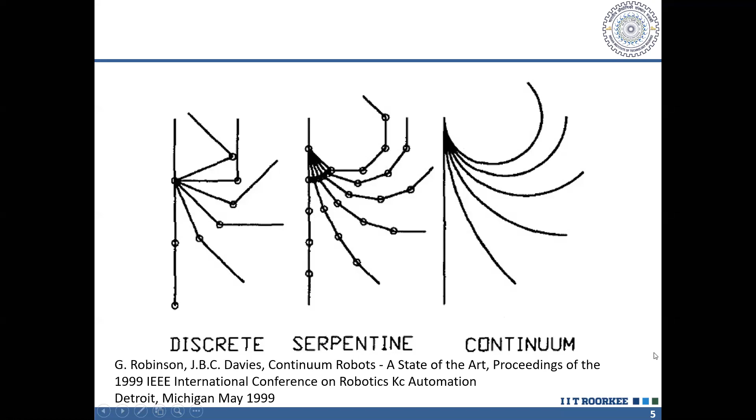So a soft robot is inherently compliant and exhibits large strains in normal operation itself. As I gave you an example, the commonly used hard robots are non-redundant, because non-redundants are used in normal operation, since redundancy actually creates a problem in control.

If you have a redundant robot, although we have some advantages, redundant basically means that you have something extra. That extra has an advantage many times, especially if some of the links fail or some joint fails, then you can reconfigure that extra degree of freedom and get the job done. So that advantage you have, but from the control perspective, there are difficulties in controlling such a robot.

The most commonly used hard robots are kinematically non-redundant, and they have a well-defined environment in which they repeatedly perform the given task with very great precision.

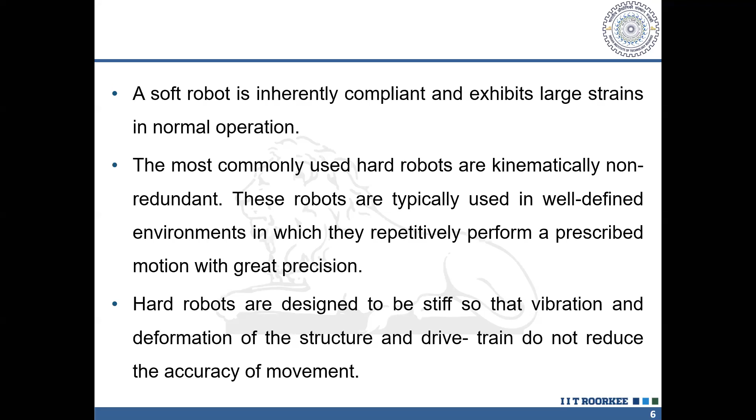These hard robots are designed to be stiff, so that vibration and deformation of the structure and the drive train - that is, the transmission used to transmit power from actuator up to the joint - do not reduce the accuracy of the movement.

Hard robots are hyper redundant when the number of joints is very large, and hyper redundant robots have the potential to work in unstructured environments and provide high dexterity. As I said, we can use the extra degree of freedom to our advantage when the robot is working in an unstructured environment. So these are the hyper redundant robots.

By nature, soft robots and traditional hard robots use different mechanisms to enable dexterous mobility. So if we look at the capabilities of hard and soft robots, let's look at the first figure.

Can you see my cursor? Anyone, please? Yes sir, yes sir, okay fine.

Suppose you have a hard robot here - this is one link, first link, second link, and third link with a gripper. Now if there is an obstacle, and suppose your robot is performing some motion, and it so happens that you cannot give the joint a specific rotation so that it does not hit this obstacle, so it is going to hit the obstacle this way. But in case of a soft robot, you can see that your robot can be deformed this way so that it is able to avoid the obstacle. So that is what we call dexterity - this soft robot is more dexterous compared to the hard robot.

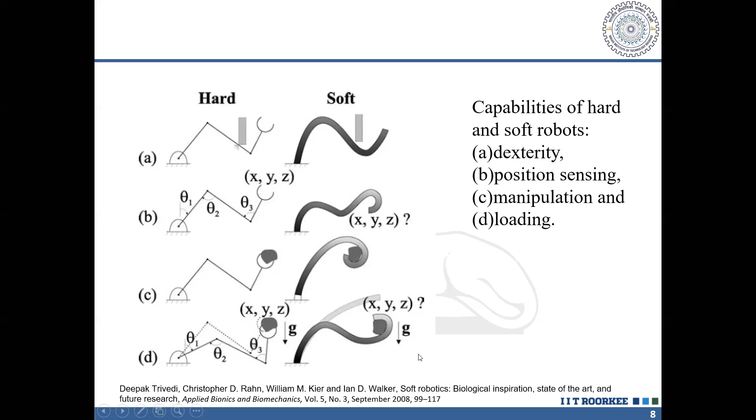So we have seen that there are two advantages: they are more dexterous, the soft one, and they can easily manipulate the object, maybe with a greater load. But the position sensing is difficult, and the deformation because of the weight is also more in case of the bionic manipulator.

So soft robots have distributed deformation, with theoretically an infinite number of degrees of freedom. If something is continuous, each point position has to be defined basically. That is why we call it as having an infinite number of degrees of freedom. This leads to a hyper redundant configuration space where the robot tip can attain every point in three-dimensional workspace with an infinite number of robot shapes and configurations.

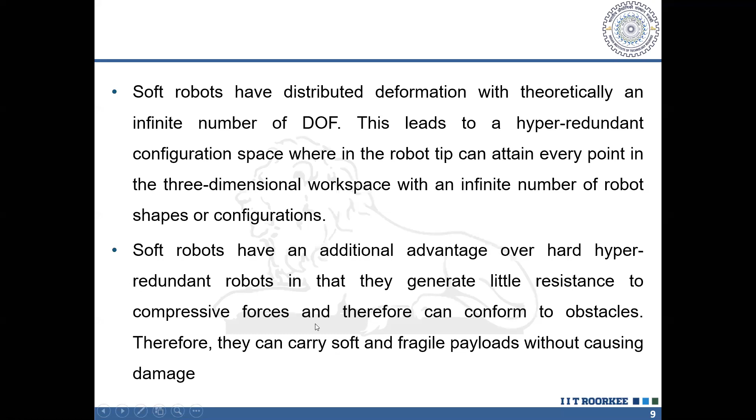But soft robots have one additional advantage over hard robots: they generate little resistance to compressive forces, and therefore they can conform to obstacles, and they can also carry soft and fragile payload without causing damage because they are soft in nature. They do not give resistance to the compressive forces. So that is the advantage of it.

The actuators of soft robots are typically integrated into and distributed throughout the structure. As I said in my first slide, either they are actuated pneumatically or they have wire actuation. Often the actuator makes up most of the structure in case of soft robots.

Soft robots fall into a class of systems termed under-actuated robots, because unlike hard robots, there is not an actuator for every degree of freedom. Other degrees of freedom may be influenced by actuators, but many degrees of freedom are not controllable. As I said, sensing and controlling the shape of the soft robot is always a challenge, and since their structure is continuum, the exact measurement of shape and tip position is difficult.

I think I discussed this point already about joint rotation. Joint position can be processed, and I believe you've gone through some basic lectures on robotics. Forward kinematics is finding the tip position and orientation for a given joint rotation. Inverse kinematics is the opposite: given the tip position and orientation, what are the joint angles? That is what we call inverse kinematics.

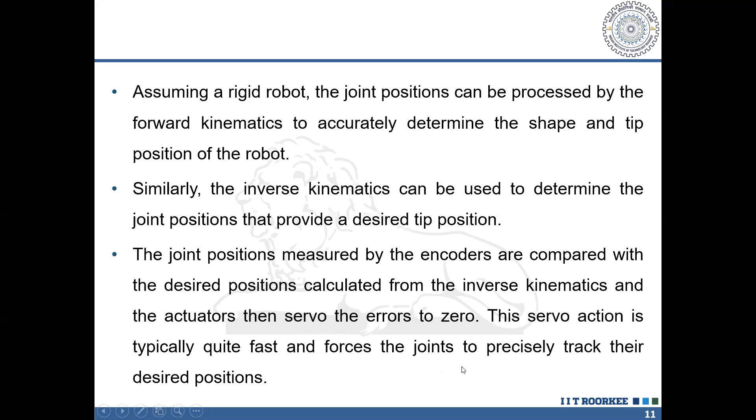Soft robots interact with the environment differently from their hard counterparts. Gravity and contact loading cause continuous deformation in the soft robot that may not be observable or controllable from the limited sensors or actuators respectively, as I discussed, this is one of the problems. But the advantage is that the soft robot can locomote using a variety of gaits, with a large portion of their structure in ground contact at any instant of time.

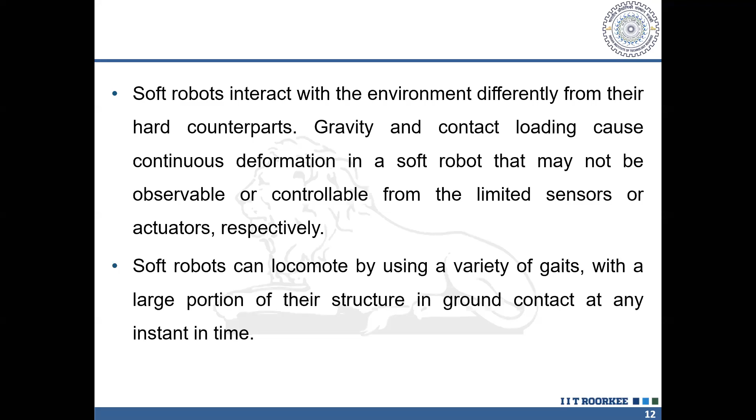If I talk about a snake robot, which can be mimicked by mimicking a real snake, that's also a continuum structure, or continuum shape, and a large portion of its structure is in ground contact at any instant of time.

Now let us look a little at the state of the art, how different people have explored different aspects of the bionic manipulator to design different types of robots.

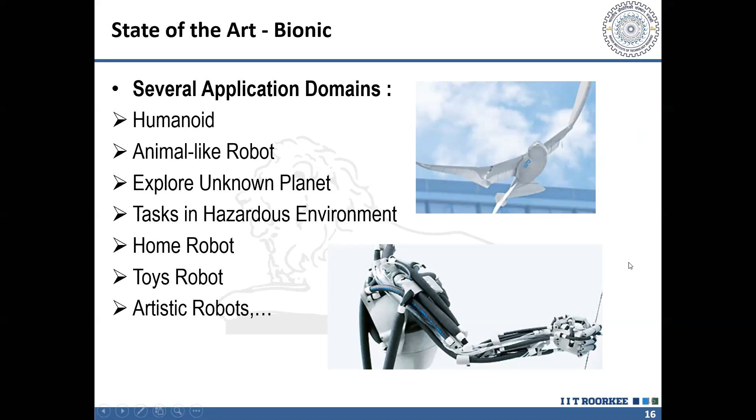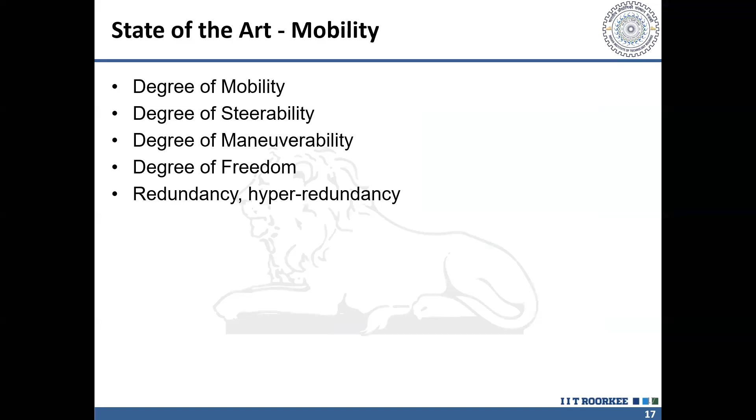Now coming to the mobility aspect or mobility issue, mobility can be explained with the help of the degree of mobility, degree of steerability, degree of maneuverability, degrees of freedom, and redundancy or hyper-redundancy.

If we look at the terrestrial mobile robots, terrestrial meaning something that is on the land, the terrestrial mobile robot could again be of different types. In general, we know about the wheeled robots, and everybody knows these types of robots are very common. So they could be either wheeled ones, or they could be tank type structures.

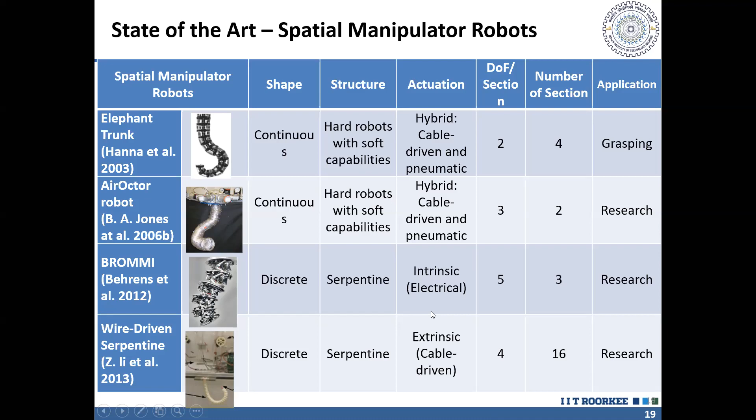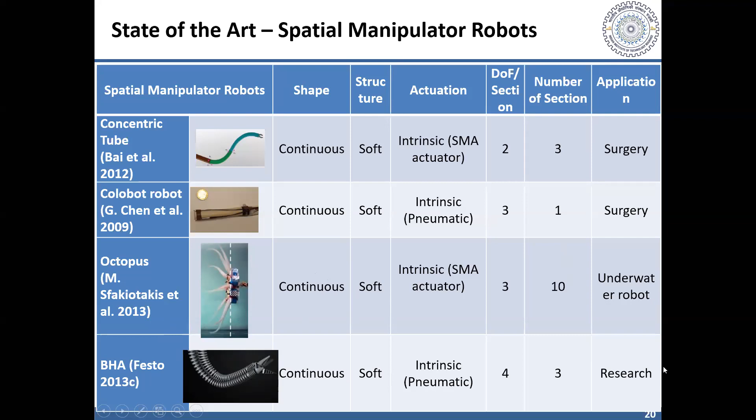Then we have an example for mobile manipulator robot - that is, you have mobile also and manipulator also. So mobile manipulator means there is motion to the base, what we call making the robot mobile, and there is manipulation capability in it. So we call it the mobile manipulator.

In industrial robots, if the base has got motion, meaning there is an additional extra axis on which the base itself can move, this falls under that category. Or we have space robots, agriculture robots, large scale pipe manipulators, ones used in hazardous applications like bomb disposal, or rescue robotics.

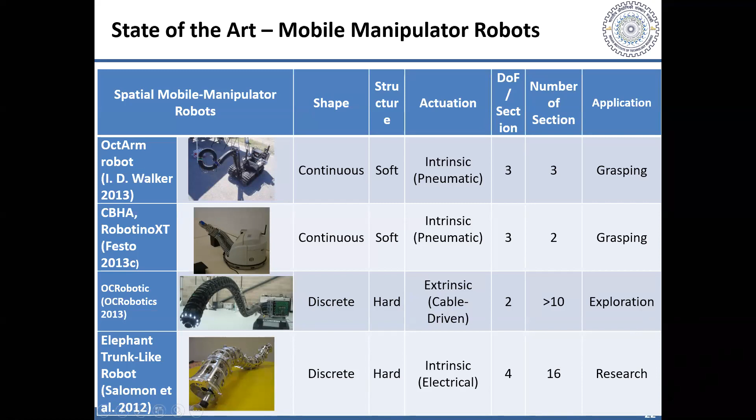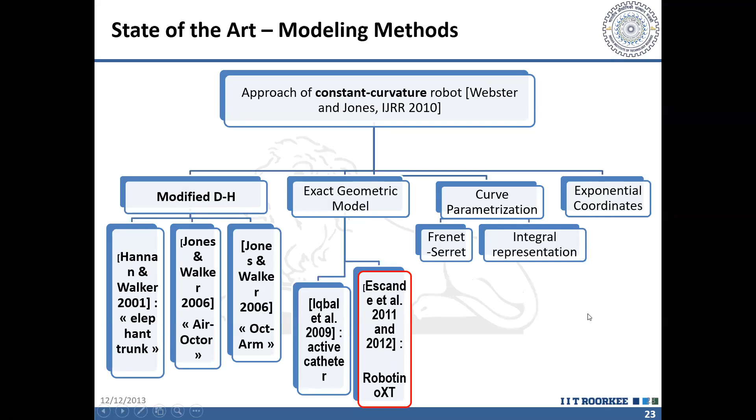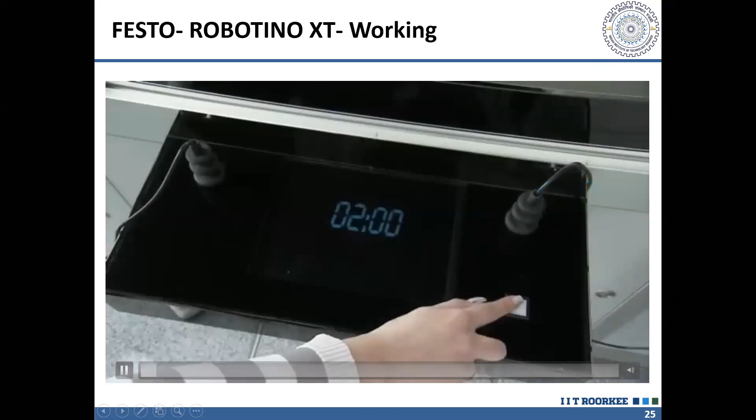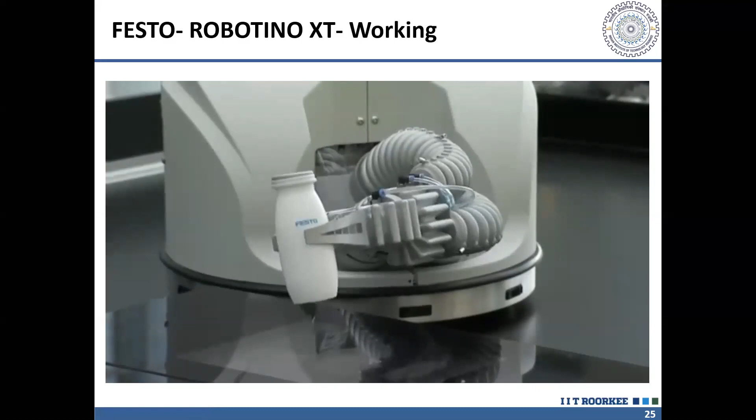So this is how it looks like, if you could see the video. Are you able to see the video? Yes sir. Okay, nice.

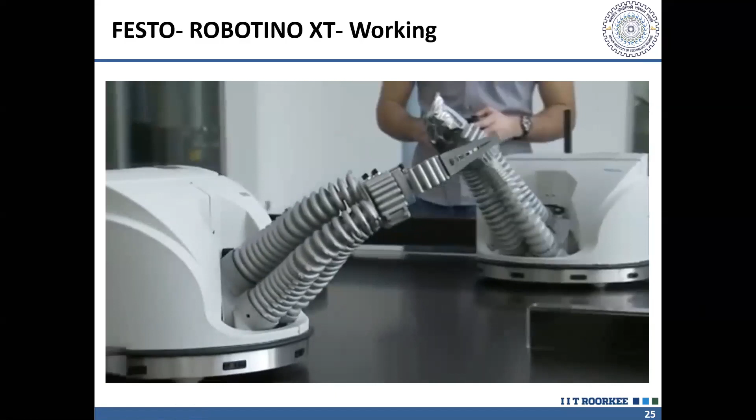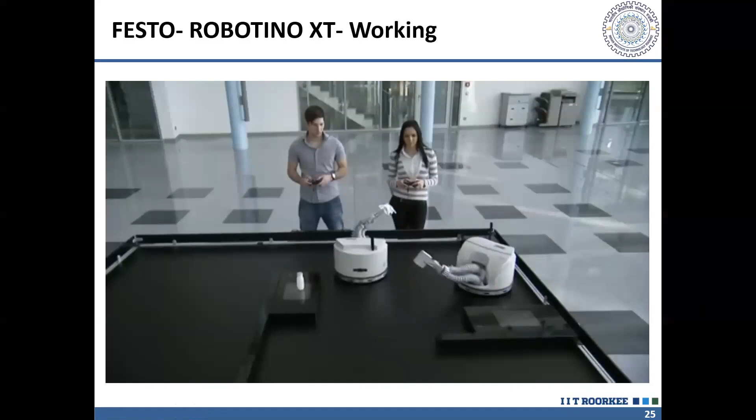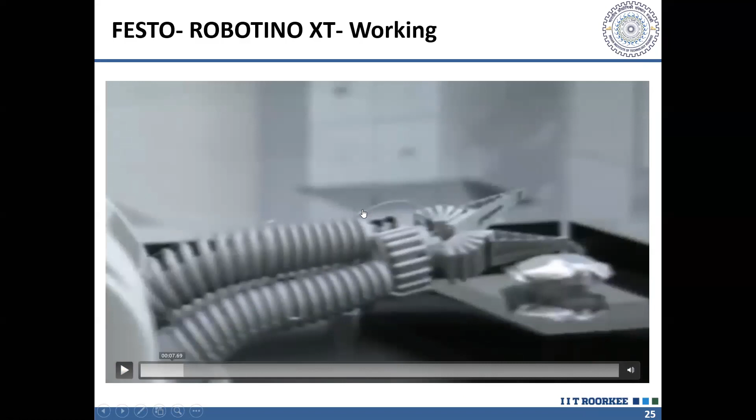So there could be two such robots, and in fact they can cooperate also. In this one, you are seeing the tubings. This tube which you are seeing is basically used to pneumatically actuate the different sections.

So you can see these tubes basically. There is a compressor inside this mobile robot, and there are valves through which air is allowed to enter into the different sections. For example, these 2 tubes are for the rotation of this gripper. Likewise, the different sections are there, and here you can see something shining - this is the wire, basically the potentiometer which I talked about for measuring length. So the length of the robot, or the different sections, can be found out with the help of these potentiometers.

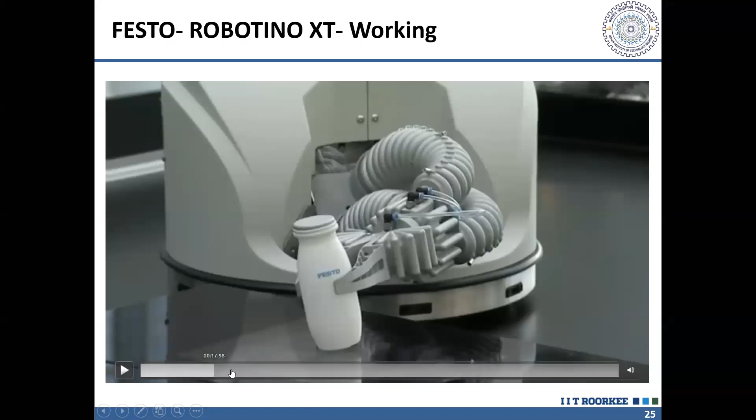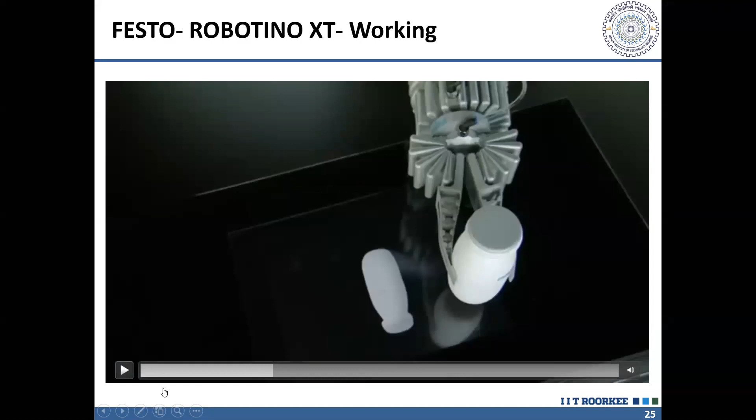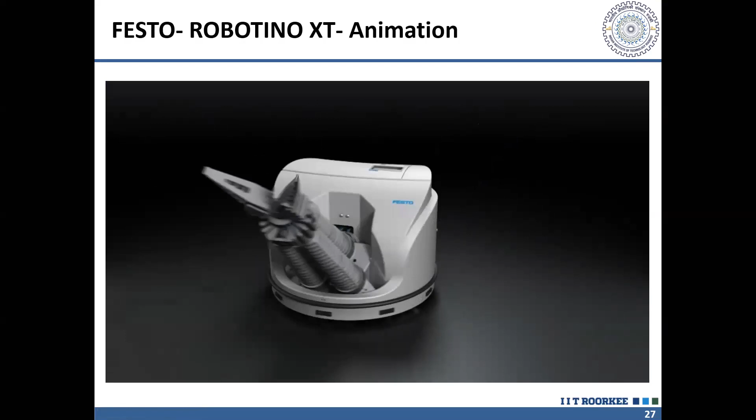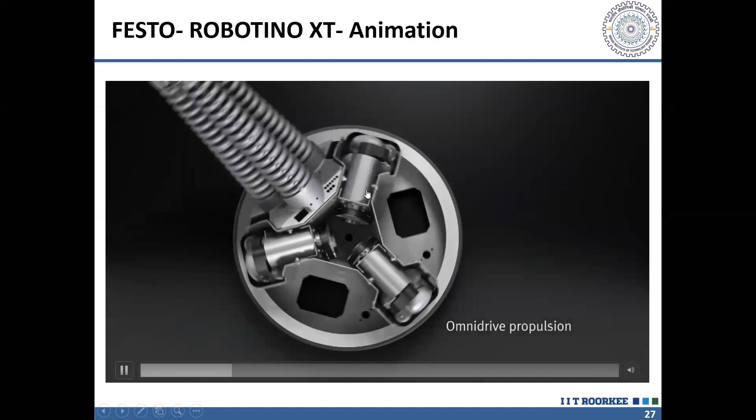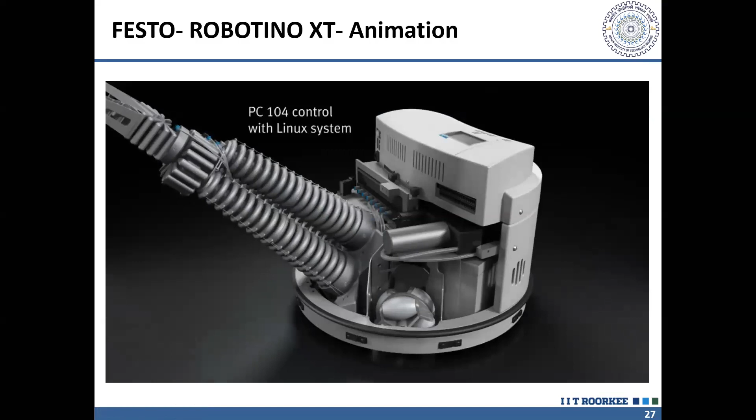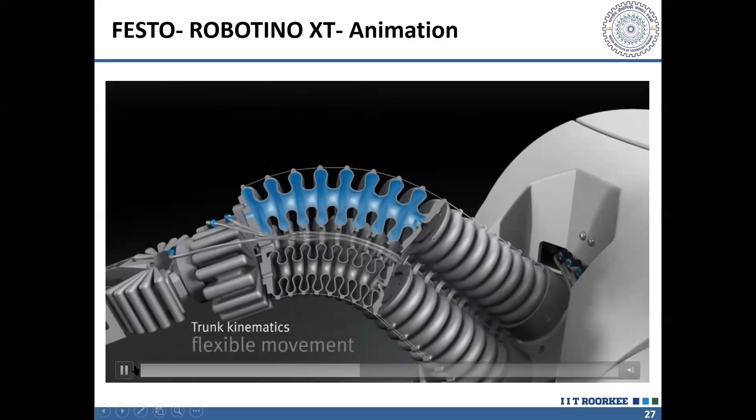And if you want to see how it is inside, the structure can be seen with the help of this animation. This is how they deform, and you can see the 3 Omni wheels here for the mobile manipulator motion, along with the description of different components. This is how these sections are basically - this is the shape of the tube, you can see from here, and these are the tubes which carry air for the actuation.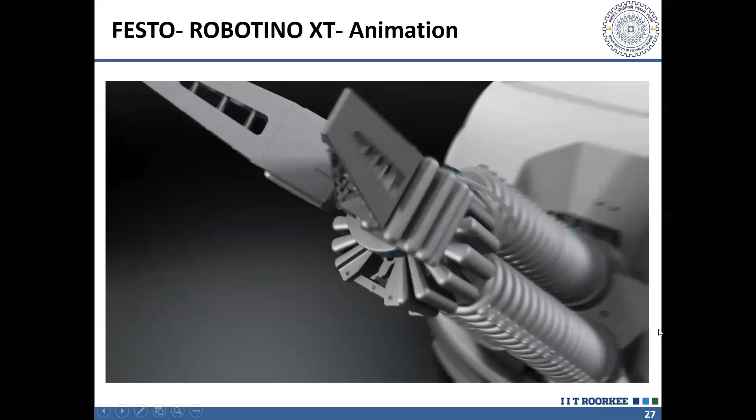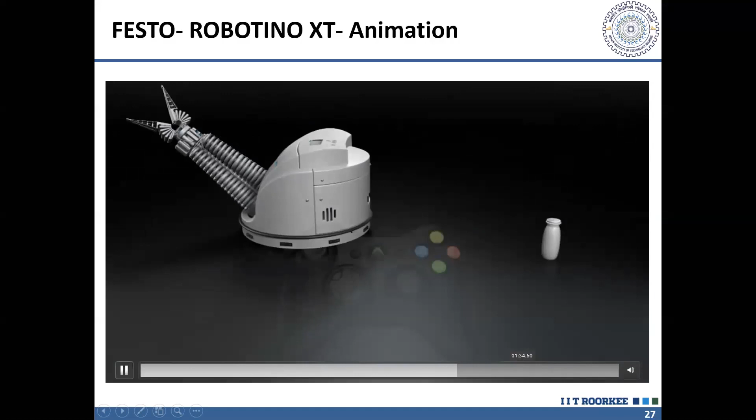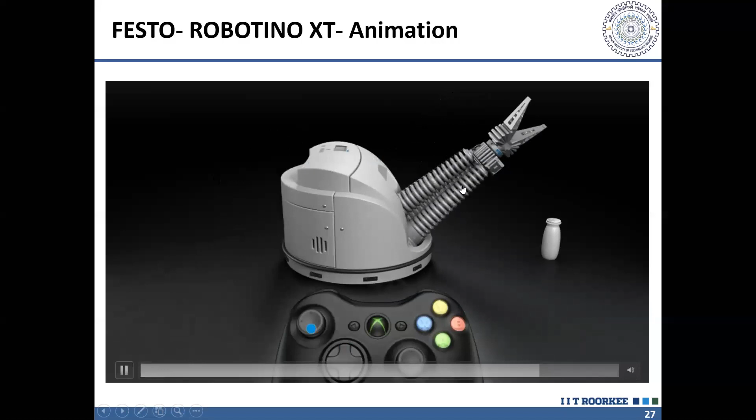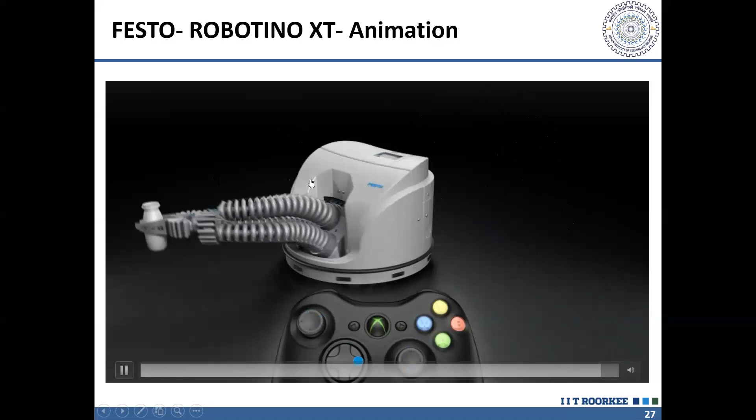Fine, I think I have to be a bit quicker. You may ask why we studied this system. One of my PhD students is currently working on this. We studied this system because currently it is actuated with the help of a joystick, but we wanted to have a closed loop controller for this one. For that, we needed to study the dynamics of this manipulator so that we can design a closed loop controller.

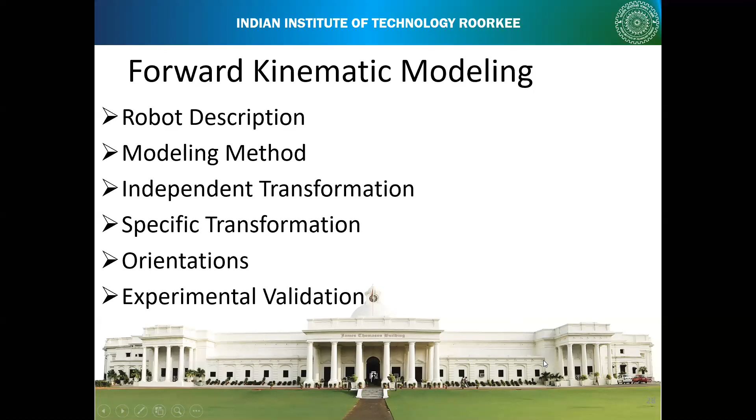So next, as I said, I'll be talking a little more about this one. The forward kinematic modeling, robot description, modeling method, independent transformation, specific transformation, orientation, and experimental validation. Some of these things I'll be talking about.

This robot is named Robotino XT, and it's an omnidirectional mobile platform called Robotino. The mobile robot comes separately, which is called Robotino, and the bionic one is put into that. The bionic one is actually called Compact Bionic Handling Assistant, or CBHA. It's a hyper redundant continuum robot. There are 2 sections with 3 tubes per section, 1 rotation part, 1 compliant gripper, and pneumatic actuation.

There is limited extension. What does it mean? That you cannot increase the length. Whatever you have to do, you do with the help of actuation, or rather deformation of the length. So there is a limited extension, and the trunk is a succession of polyamide based backbones where their deformation depends on the material flexibility.

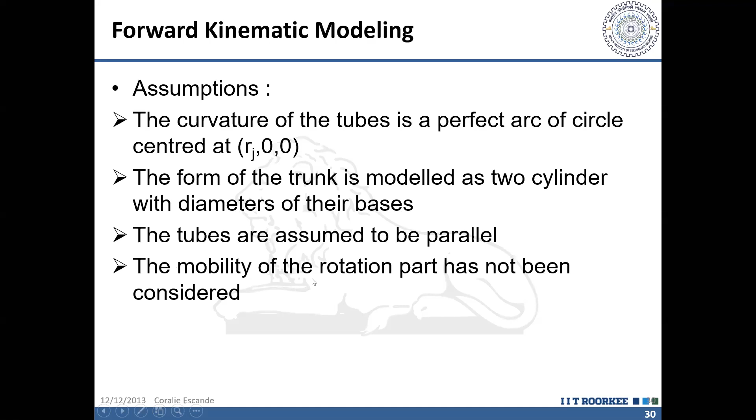So when modeling, as I gave a hint, we model them as a constant curvature section. The curvature of the robot tube is a perfect arc of a circle, which is centered at say RJ00. RJ is the radius of that particular section, and the form of the trunk is modeled as two cylinders with diameters of their bases. The tubes are assumed to be parallel, and the mobility of the rotation part has not been considered in this modeling.

So here we can look at the forward kinematic model for this. As I said, these are the two sections. Although these are part of the frustum of a cone, basically you can see that they are reducing gradually, but to simplify our analysis, we assume that this part has got a diameter D1 and this part has got a diameter D2.

As I was telling you, there are potentiometers to measure the length. Say this potentiometer has got a length L1. In the back, there is another tube, so that has got length L2, and this one has got L3. So here we have L4, L5, and L6.

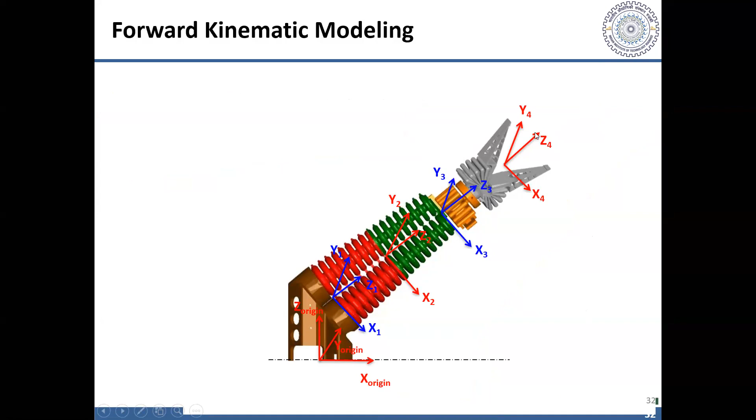For the forward kinematics in this case, if you are given these tube lengths, what are your position and orientation of the tip, basically? That is the forward kinematic problem in this case. So we assign a coordinate system at the origin, then a coordinate system at the base of the first section, second section, and here for the gripper, rotational degrees of freedom of the gripper, and finally a coordinate system at the tip.

So as I said, what we have is basically the tube lengths, that is L1, L2, L3, L4, L5, L6. These are the tube lengths. As I said, there are 6 tubes. So these are the tube lengths. You can see the tubes here as I was showing you. This is L1, L2 is in the back, L3 is this one. This is L4, L5 again is in the back, and this is L6.

So the question is, if I'm given these tube lengths L1, L2, L3, L4, L5, L6, the forward kinematic problem is: what is my tip position X, Y, Z, and what is my tip orientation, that is phi, theta, psi? So the 3 Cartesian positions and the 3 orientations, finding out for the given section lengths L1 through L6. This is the forward kinematic transformation.

Now, how this is done is basically in this way. If you are given these 6 tube lengths, first what we do is find out the arc parameters. That is, we find out the radius of the 2 sections, R1, R2, and then again the orientation of these 2 sections, which is measured with the help of angle phi and theta for the first section, phi1, theta1 for the first section, and phi2, theta2 for the second section.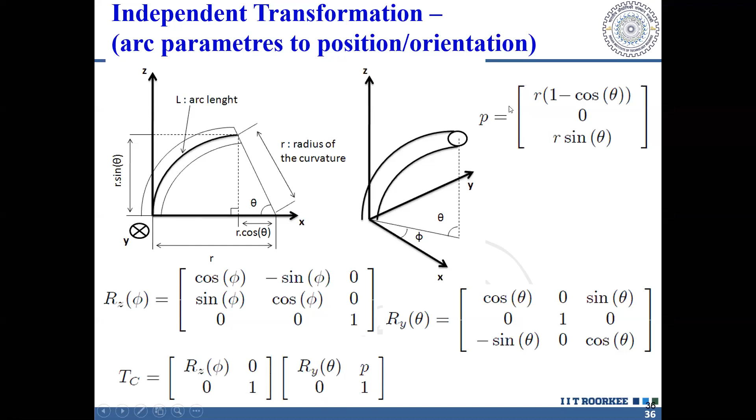So basically, this transformation can be given like this, the multiplication of these two matrices, which represents rotation about the y-axis by theta, and here are the translations, and here rotation about the z-axis by phi. The translation in that case is 0, so here you have 0, 1. If we multiply these two matrices, this is what we get. So here we are getting the position and orientation of the tip if we know the angle phi, theta, and r.

Now in the above equation, the tip frame is aligned so that x points towards the center of the circle and the z axis is tangent with the curvature. Now if I have to represent with respect to the base, where the tip is with respect to base, naturally we have to bring it back to the base frame. If we express that with respect to the base frame, the transformation matrix is slightly modified, and we get this formulation.

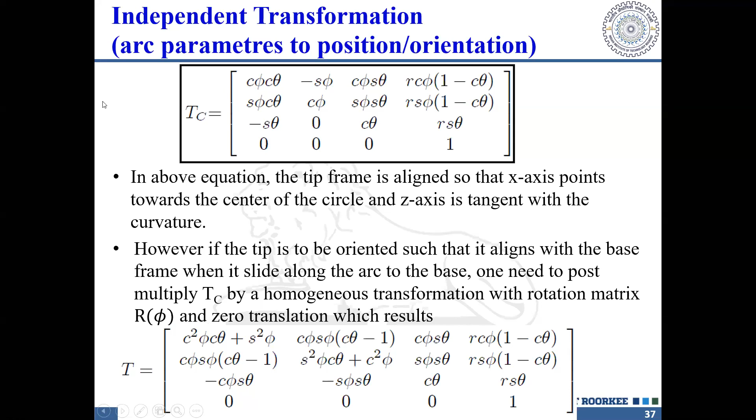Then the question comes, how do we get r and phi? Because we are only given the link length, and this link length or section length I have found out using the potentiometers. So I know this length L1, L2. L1 is for the first section, L2 is for the second section. So this again we can find out.

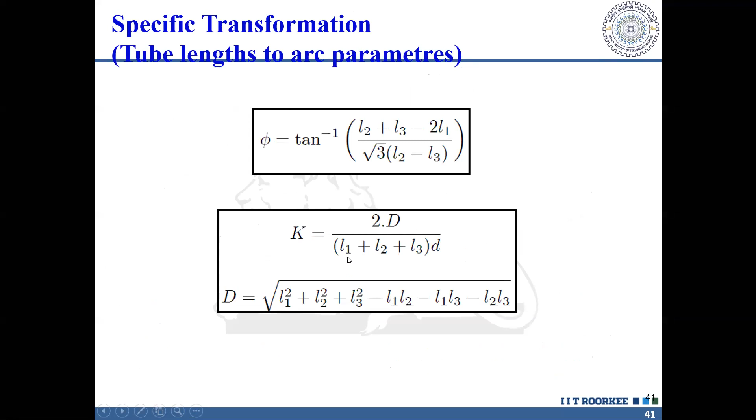Here we can get the parameters for the given lengths L1, L2, L3 - we can get the parameters theta and phi. This is how we evaluate the phi parameter, and 1 by r is k, where d is like this. So this was for any section. For section 1 we have theta 1, phi 1, r1, and similarly for section 2, phi 2, theta 2, r2. Remember, we only know the length of the different tubes, which we get from the potentiometer. So if we know these lengths from the potentiometer reading, we could get these values.

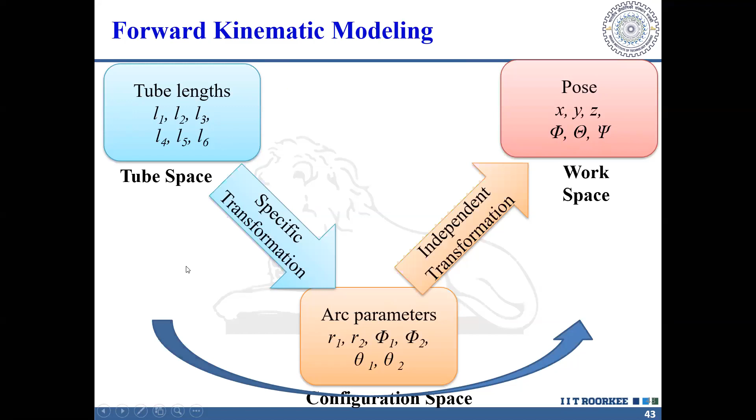So what we wanted was, with respect to these tube lengths, to find XYZ, phi, theta, psi. So from these tube lengths we found out the arc parameter, and from the arc parameter we find out XYZ. I did it actually in the reverse way here - from length we found the arc parameter, and for the given arc parameter we found the XYZ.

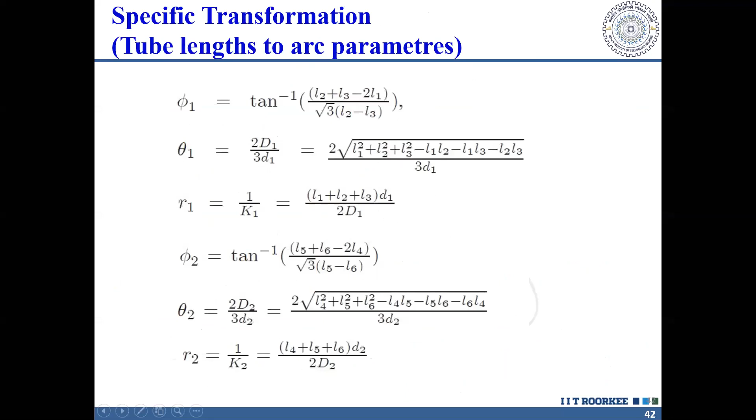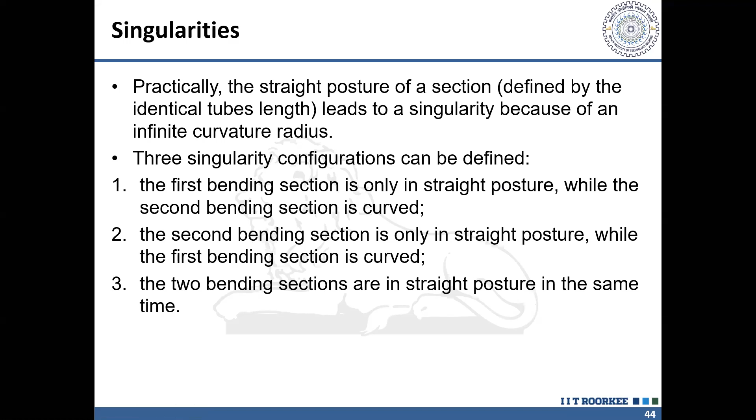Now, there are some positions which cannot be reached. Such positions are called singularities. Practically, the straight posture of a section leads to singularity because of infinite curvature radius. Three singularity configurations can be defined: the first bending section is only in straight posture while the second is curved; or the second bending section is only in straight posture while the first is curved; or both bending sections are in the straight posture. So if any section becomes a straight posture, naturally its radius of curvature becomes infinity, and you get the singular configuration.

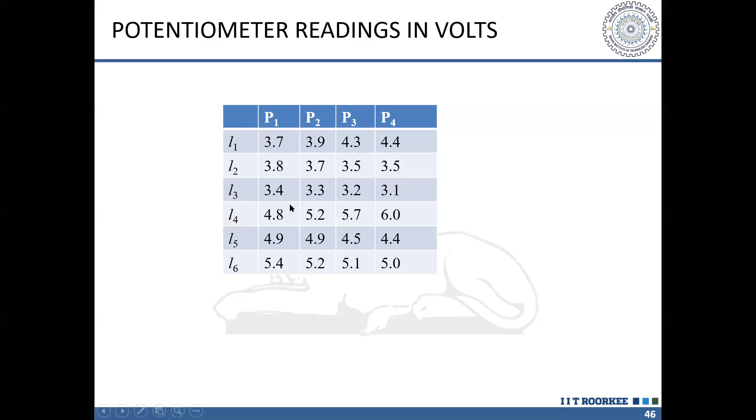So what we did - we measured some of these parameters, such as the angle of inclination of the base, the dead length of the different sections, and the base to tip diameter of the different tubes. All these parameters were measured, and then we took the different potentiometer readings L1 through L6 for the different positions or points P1, P2, P3, P4. So for one configuration - one XYZ, theta, phi, psi - we have this potentiometer reading, another XYZ theta phi psi we have another reading, and so on.

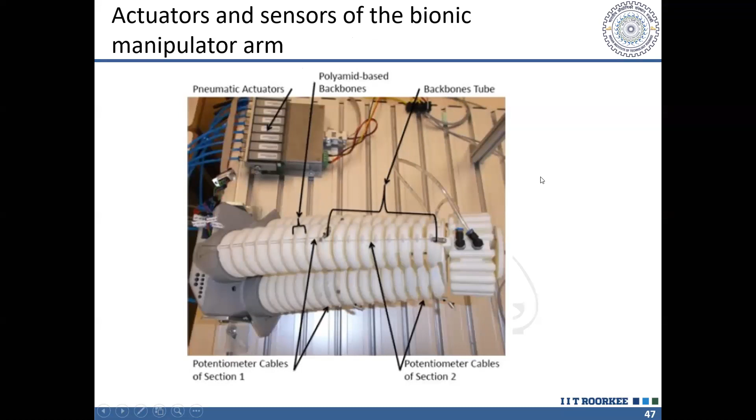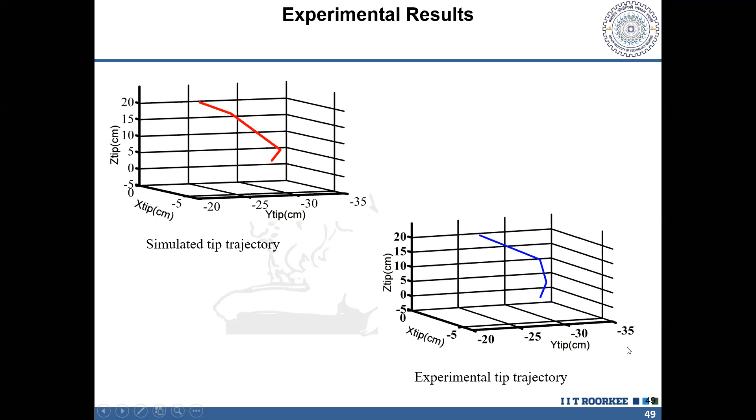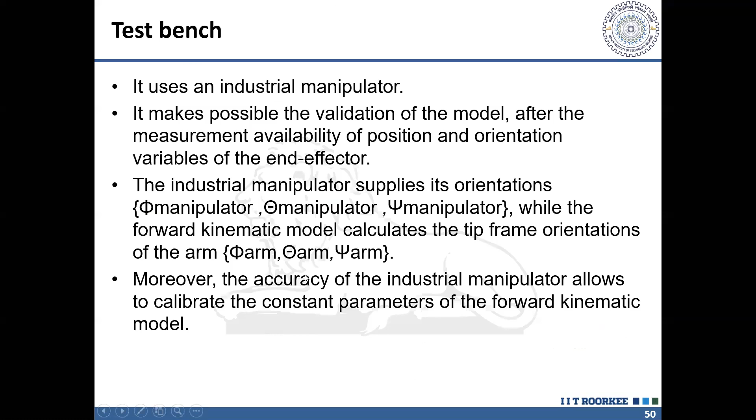Then we took a test bench, because this way things were not very accurate, as you can see from the shape. So a test bench was designed, and in that test bench, here is the configuration - let me explain. This is my manipulator, the bionic manipulator.

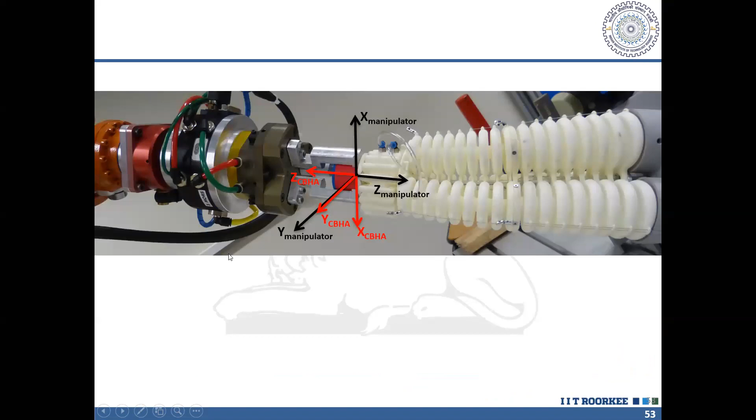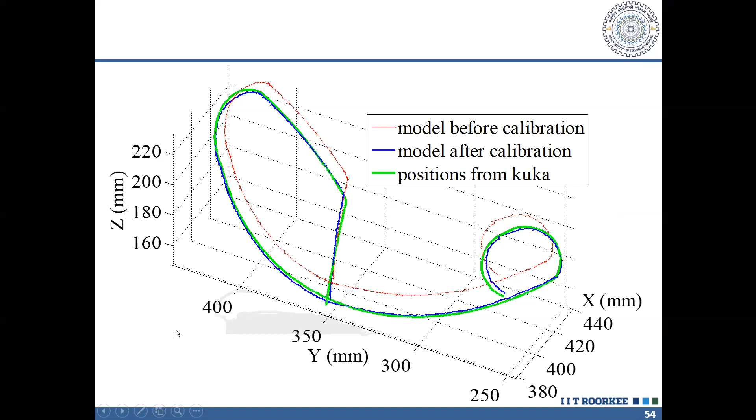Now for measuring the tip positions, previously we used the camera. In this case, there is a KUKA robot, and the KUKA robot tip positions can be measured with the help of the console - you can measure these joint angles, and if you can measure the joint angles, you can find out the tip positions. So that value we got from the robot console reading, and the rest of the things were the same. We carried this out making the frame same for both the KUKA and the bionic manipulator. Then some plots were carried out - before calibration, after calibration, position from KUKA, X, Y, Z coordinates - and the errors were plotted. All these things were done, and the results were found to be pretty good.

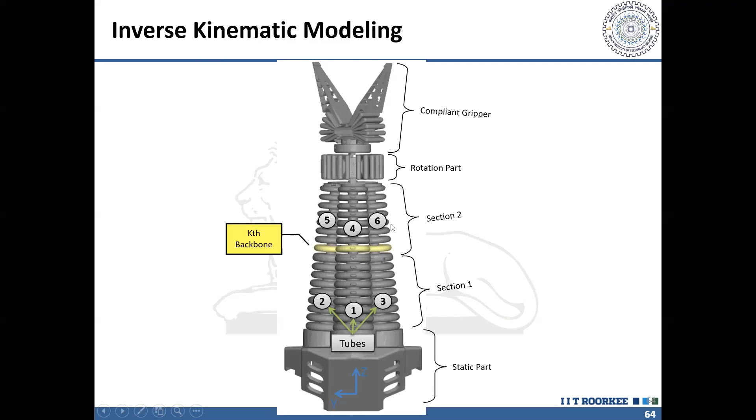So the model, although a very basic model, is what we proposed, and then we experimentally validated it. And the inverse kinematic problem could be stated as: you are given the XYZ position, and you have to find out the length of these sections - that is, given the XYZ position, find the trunk posture L1, L2, L3, L4, L5, L6.

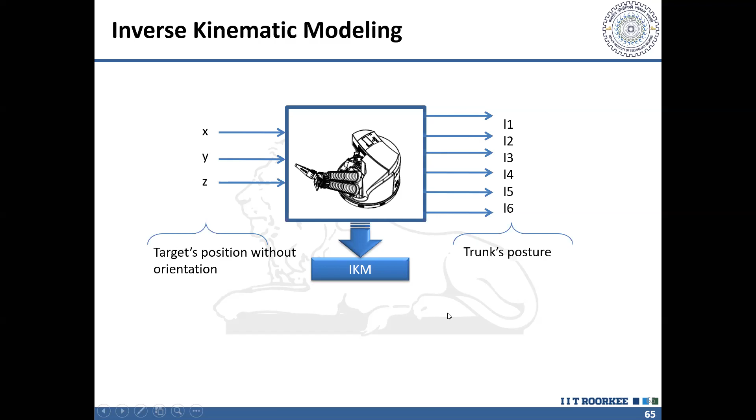So there were errors in our calculation due to the assumptions we made. The curvature form of the trunk is different from a perfect arc of a circle. The form of the trunk is actually a cone, not a cylinder, and calculations would be more difficult if we assumed the cone shape. The characteristic of the polyamide material of the robot is not well known, and pneumatic actuators are known to be inaccurate in positioning tasks. Variables of configuration space are coupled, and extension gives a larger space. We assumed sections would not extend, but they actually do, giving a larger workspace. Then we carried out work on two such robots cooperating together.

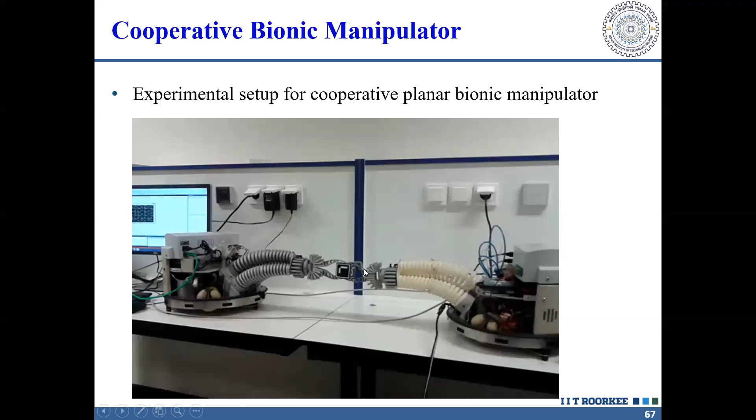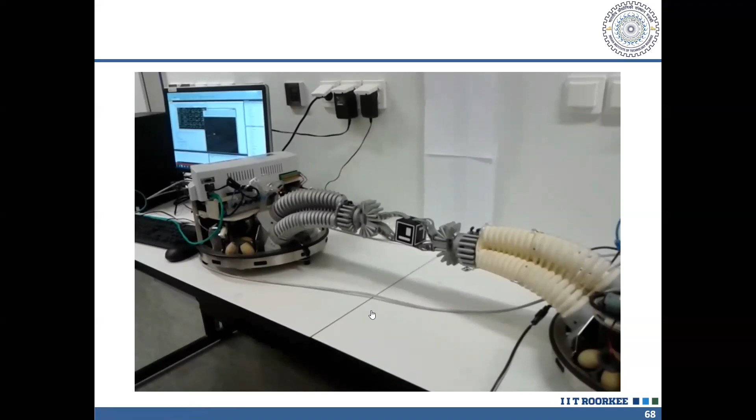I'll quickly demonstrate these things. This work was carried out in France. Here you can see two robots cooperating together. You can see there is considerable slip. We assumed there is no motion to the base; the base was not given motion, but the two robots were cooperatively handling the object. Here we were just trying to see the different types of motion.

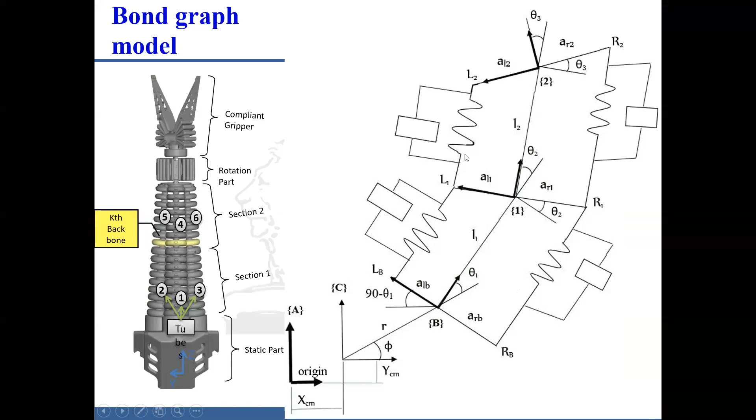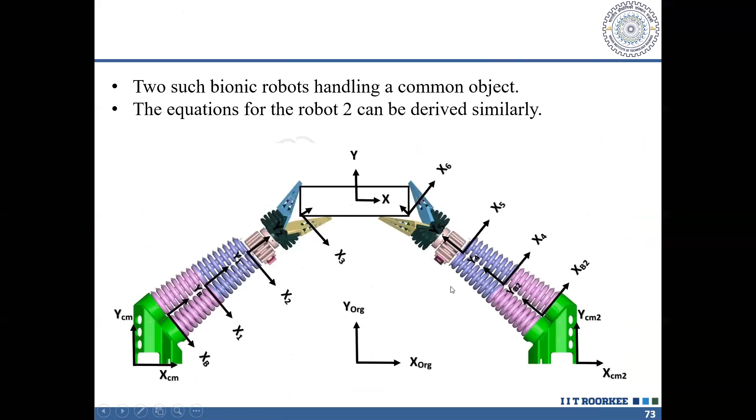As I said, our aim of study was to create a dynamic model for this. We are currently working on it, or it's almost complete—our result is at the communication stage. We worked on the dynamic model by defining the kinematics, and then after kinematics, we defined the bond graph for the cooperative behavior. This is the bond graph model, and here are some simulated results. These were the initial conditions and simulated results for the tip.

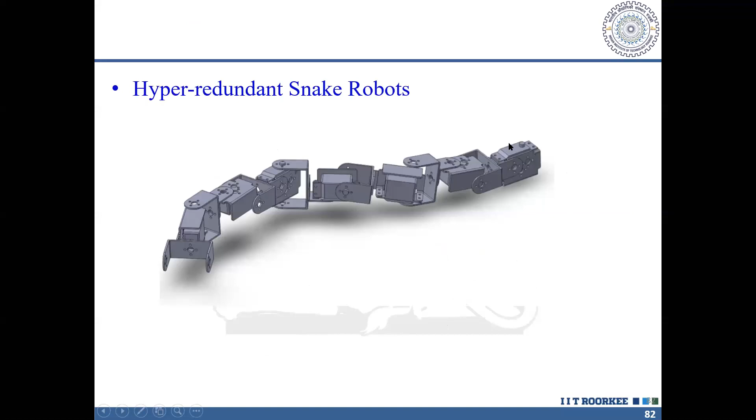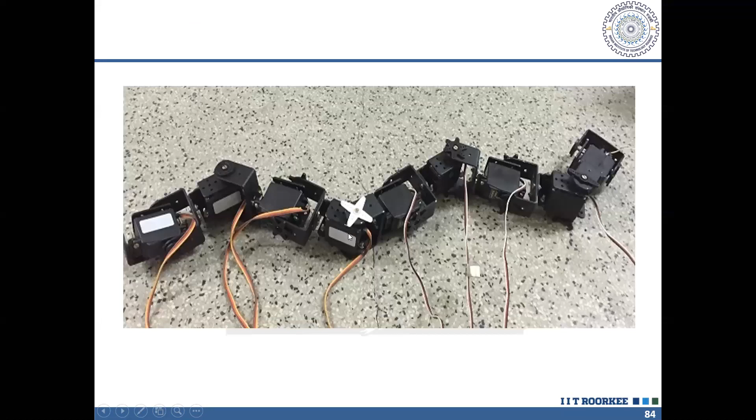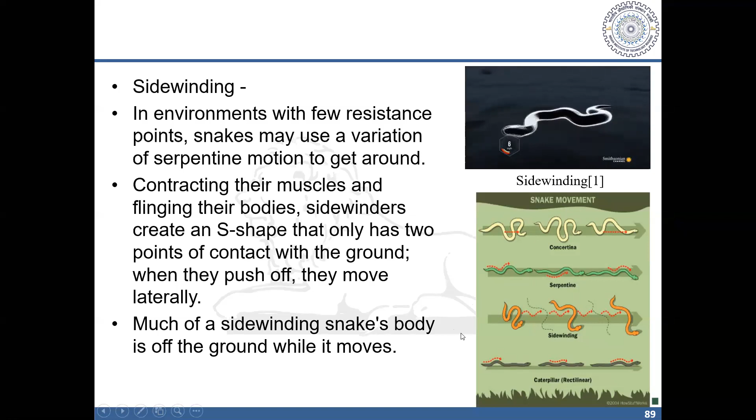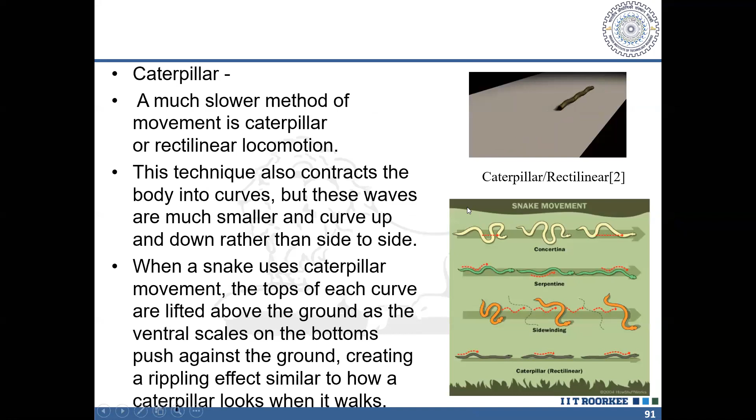Then, one of my other students is working on a hyper redundant snake type of robot. Again, this is a bionic one. What we have done is develop this type of robot. There are different types of snake motion: concertina, serpentine, sidewinding, and caterpillar type of motion. This is how the side winding is there, and these are side winding or rolling motions. This is the caterpillar type of motion for the snake, and we try to work on the rectilinear motion as well.

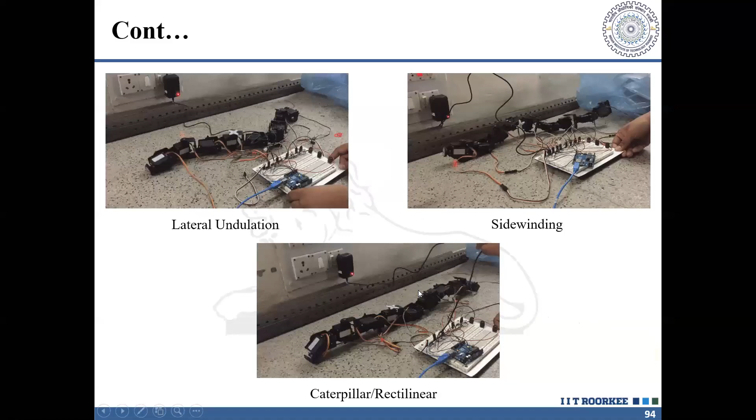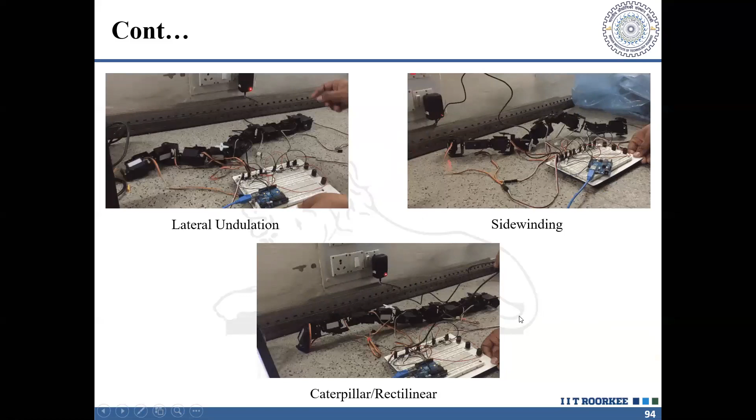We tried to work on this one with the help of hard robots—these are not soft robots. You can see the simple motor-driven joints. There are large degrees of freedom, what we call a redundant robot. These are different types of gait: lateral undulation, side winding, and this is for the caterpillar type of motion. With this, we are currently working on the bionic version of this robot. One of our students is working on it, and we have developed a novel actuator for this, which is in the process of filing a patent.

With this, I would like to thank you. If you have any questions, I'll be happy to answer them.